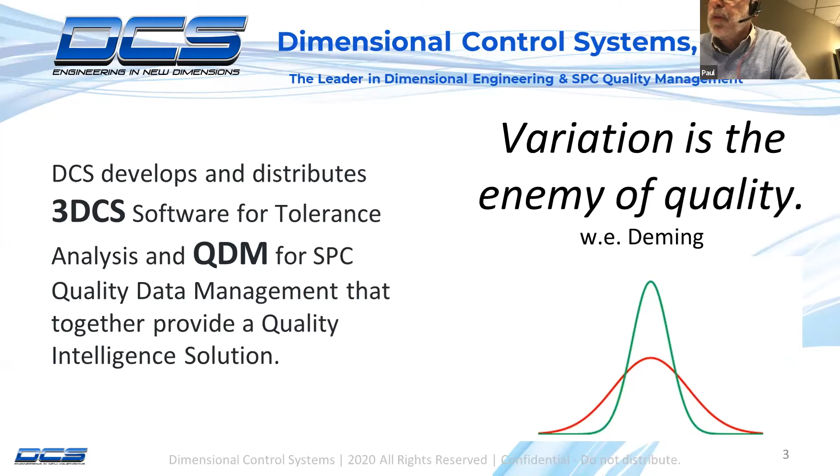DCS, or Dimensional Control Systems, is a world leader in the war on variation in manufacturing. DCS develops and distributes software solutions to help you throughout your product development lifecycle. 3DCS tolerance analysis software and QDM for SPC, quality data management, work together to provide a cradle-to-grave solution and coverage for your organization. I'm proud to be here today to introduce an exciting new function in the DCS software suite of solutions, the 3DCS Datum Optimizer.

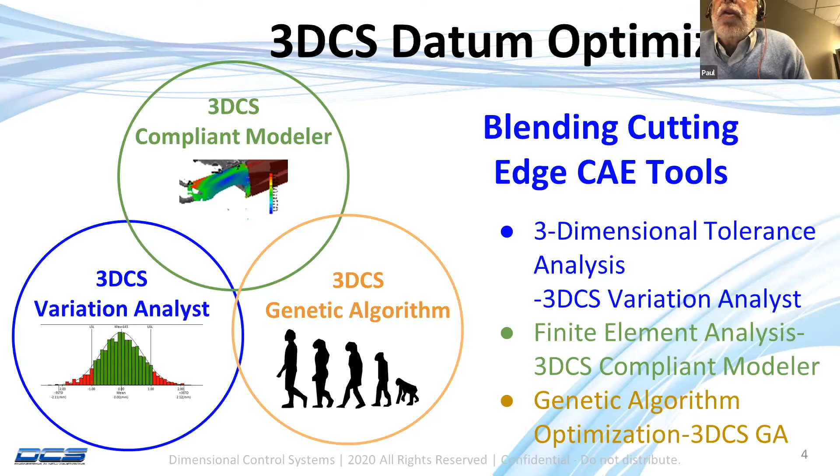The 3DCS Datum Optimizer is a unique combination of state-of-the-art CAE tools, including two that you may be familiar with, the 3DCS Variation Analyst tool, the 3DCS Compliant Modeler, and our newest tool, the DCS genetic algorithm. A little bit about each of these to try and frame this up and make sure we're all talking the same language.

The Variation Analyst is a tool that enables you to analyze the effects of part tolerances and assembly methods on dimensional quality. You can find and fix problems before they hit the factory floor. Included in the 3DCS VA, Variation Analysis Toolkit, is a Monte Carlo simulator that allows detailed statistical analysis and problem identification, as shown in the image on the left there, where we simulate many parts and then we can do statistical analysis, including histograms like this. You can see that there is a lot of production out of specification. We have a mean shift problem, etc.

Then DCS VA has a number of analytical tools to help you analyze the problem, such as geofactor analysis that can help you identify solutions and improve your designs quickly, as shown on the right. So we went from what's on the left, a lot of red, to what's on the right, where we have most everything in green.

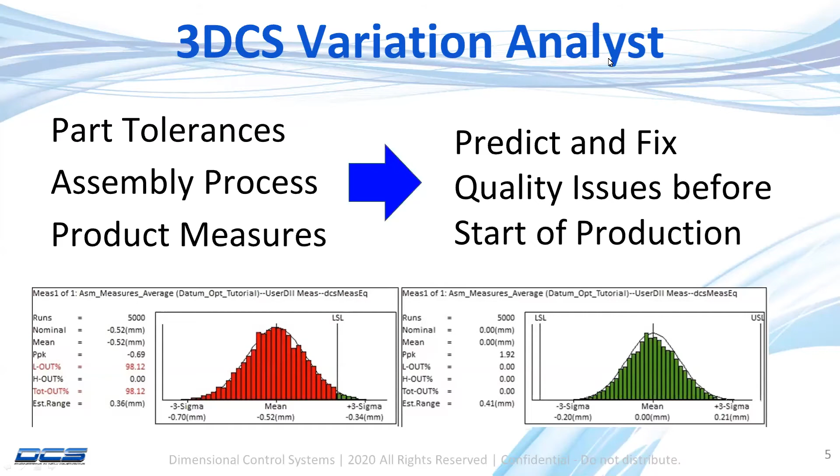The 3DCS FEA Compliant Modeler blends tolerance analysis with finite element analysis to allow you to measure the impact of product stiffness or external forces such as clamping, welding, bolting, or gravity, and all those could affect your dimensional quality.

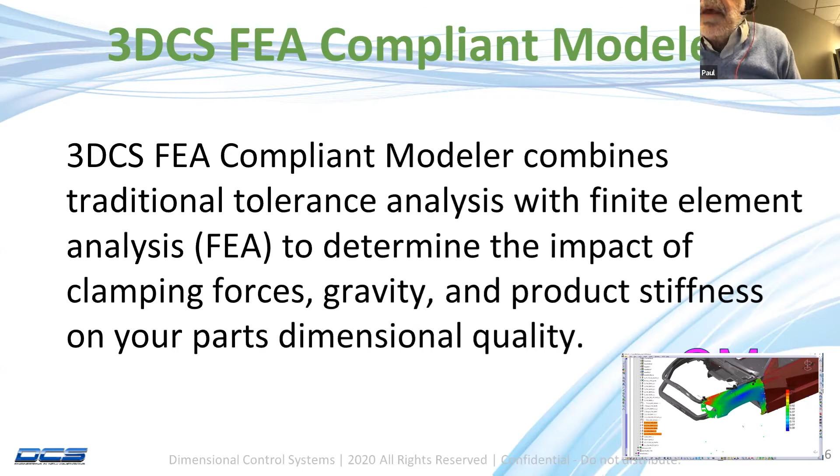These tools have been out for a number of years. What we've got is a new tool, the genetic algorithm, an optimization tool that allows us to help you find better solutions by automatically creating new product or process alternatives and evolving the design to better and better solutions. It's kind of a Darwinian development where only the strong survive and the weak are eaten. So we'll talk a little bit more at length about how we applied this to the datum optimization problem as the presentation goes on.

So we're here today, well, we're here virtually I guess, to discuss the 3DCS Datum Optimizer. Let's start at the beginning, which seems like a good place to start, and just make sure we're all on the same page and talking the same language.

Datums are fundamental and the foundation for dimensional management, dimensional control, and a key to variation reduction. Datums are used throughout the manufacturing process to locate parts, assemblies, and or the final product, to machine the product, assemble the product, join things together, and in measurements and measurement analysis.

Proper use of datums creates a well-defined coordinate system, as shown on the right, which enables you to locate features in their proper orientation and position. Datums are key to managing and minimizing variation, the enemy of quality.

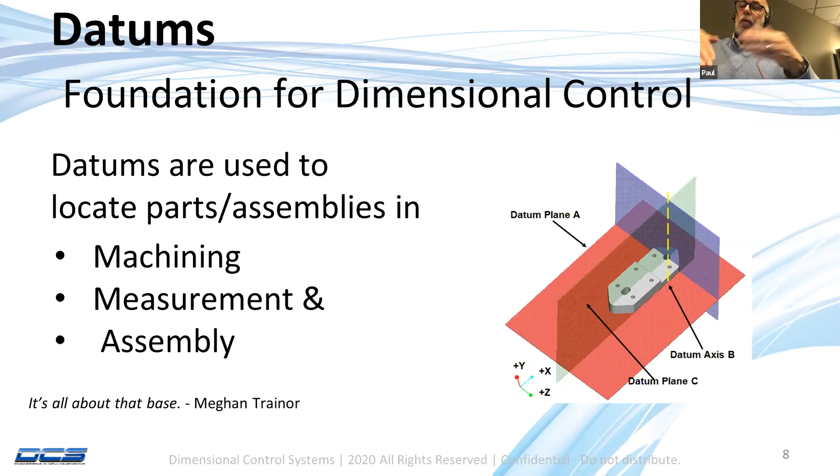Next slide, please. So what we're going to do is illustrate our new feature, this 3DCS Datum Optimizer. We wanted to choose a product that everyone could kind of understand and is familiar with, such as an automotive fender, because everybody's seen an automotive fender.

If we had picked up a different part, a more complicated part, like say a flux capacitor, we might have to spend more time explaining what the part is and how it works. We'll just pick something that is on almost every car, or at least the new ones, because in my neighborhood there's a few cars running around without fenders, I'm sure.

Fenders are fairly large, yet they're thin-walled. They are both stiff and flexible. If you lean on your fender too hard, you'll see it's not too stiff. You might dent it. And before all the attachments are made, it really is quite flexible. And you can move it around a little bit, and then it gets a lot of its rigidity after you join it to the vehicle.

Fenders also interface with a lot of the vehicle. We've got an interface to the door and the hood, the lamp, the fascias, the tire envelope. It interfaces with quite a number of parts. And as automotive manufacturers seek to have jewel-like quality, that means precision fits between all of the parts, the fender is one of the key components.

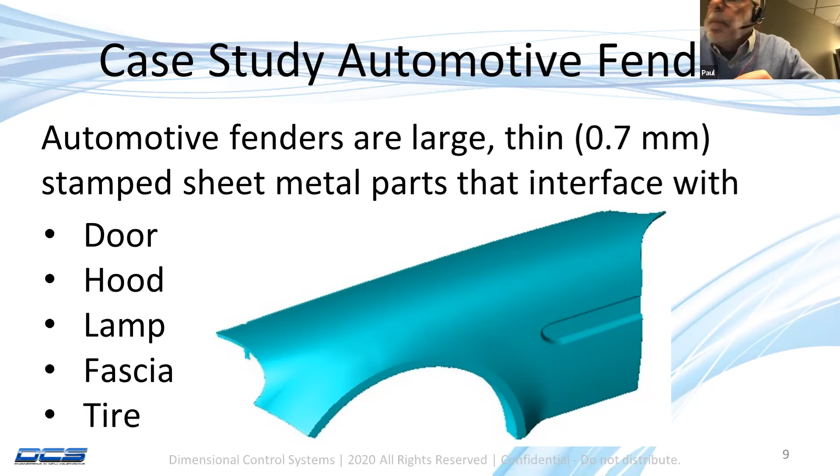Next slide, please. So the following slides will describe a typical project flow and show how 3DCS tool suite, variation analysis, compliant modeler, and the Datum optimizer work together.

Typically, we start with a team of people who have selected some datums and tolerances for the fender and the parts around it. They do that with some best practices or their experience or whatever, and then they do some analysis.

So 3DCS variation analysis was run to predict dimensional quality, and we get a plot. We can get one of our many plots, might be a histogram like I showed before, or this color plot where you can see how much variation we have around the fender. Red is high per the scale on the right, and then blue would be calm and low.

What we would like is everything to be blue, very little variation. Anywhere you see the red, we are having bad fits to the mating parts, which in this case might be the lamp and the fascia. Next slide, please.

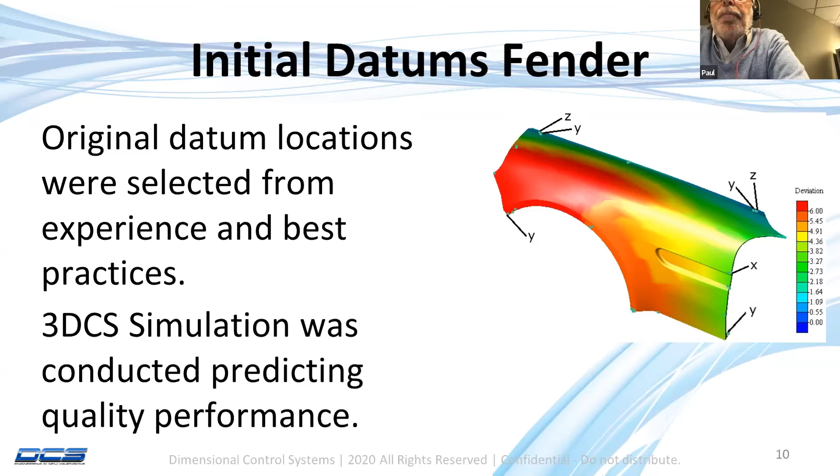So, you could say, Houston, we have a problem. What we've got is we have a number of parts that aren't meeting the specifications. We've got some mean shifts. We've got some excessive variation. We've got part distortion because it's not rigid, etc.

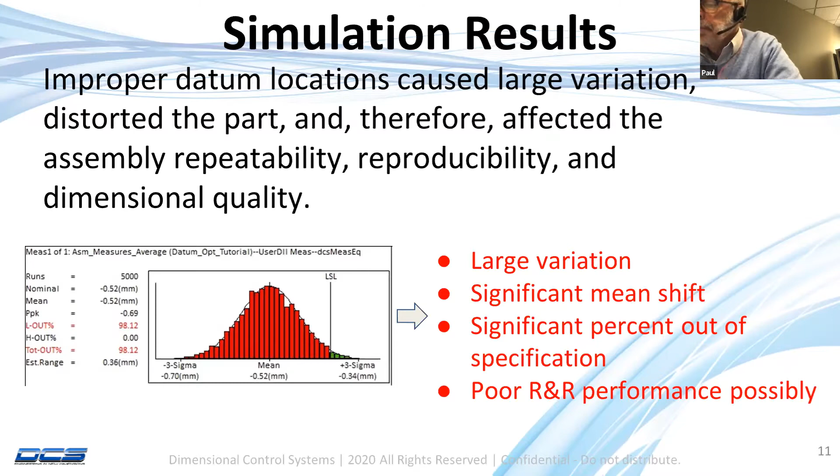Next slide, please. Now, we could locate the part many, many ways at many different points, and then we can combine these many different ways to locate the part. They picked the ones they've always used, and they got the results that you saw before. What if we changed? What if we moved from one part of the fender to the other to locate them? Now, the problem, and it's a business problem, is there are so many alternative datum schemes. How can we find a solution quickly?

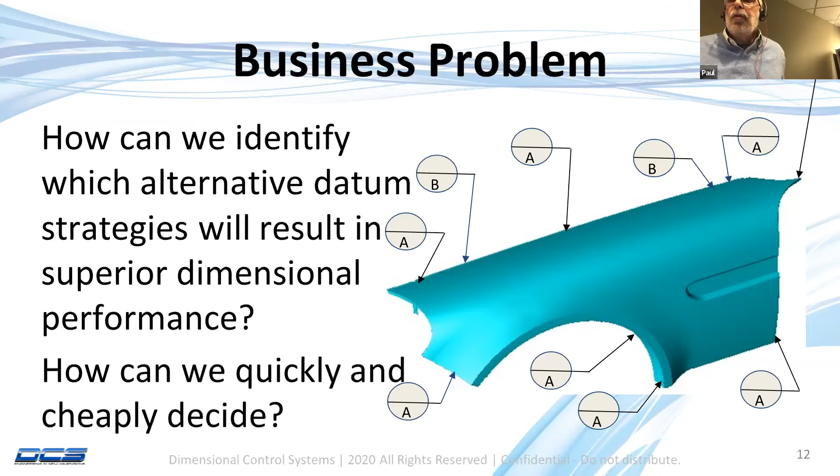So if you go to the next slide, this sounds like a combinatorial problem. So therefore, we could quantify the number of alternatives. And I'm sure you all remember from statistics class, the combination formula shown here, C sub n sub r, which calculates how many ways you can combine n factors. That would be the number of potential datums. R ways, the number that we're going to use in our study. Now, this isn't math class, so we're not going to ask you to solve the formula or remember the formula, but we've given you an idea of the magnitude of the problem with the table we've shown on the left here.

The first column is the number of datum candidates we have, the number of different ones we could choose, and then the number of datums we will use is shown in the second column. And then the number of combinations is shown in the third column. If you had 20 candidate locations, we wanted to use 6 datums to maybe over constrain our primary datum. We'll talk about that a little bit later. There's about 40,000 possible combinations.

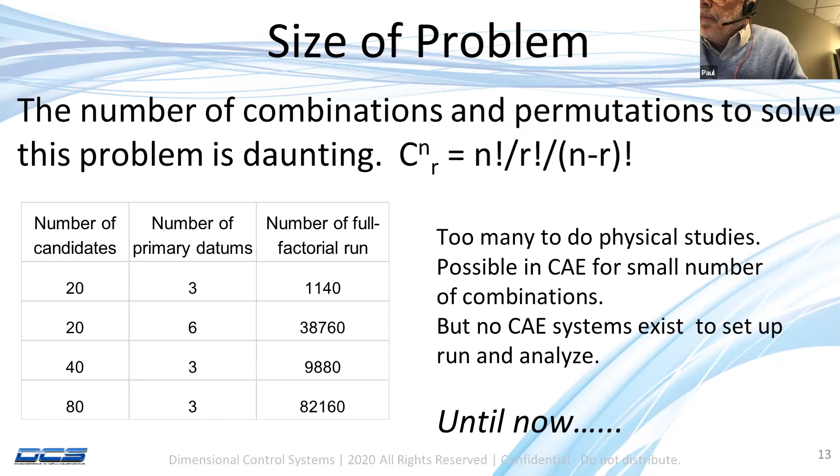If we had 80 candidate points, we're only going to use 3 for our primary plane. There's 80,000 combinations. And that's way too many to do physical studies, way too many to do in CAE. So this is really why we created the 3DCS Datum Optimizer. Next slide. The Datum Optimizer, or DO, just do it as we call it, provides the means to set up and run the combinatorial problem in just a fraction of the time, as we'll show you in a demo after I'm done talking here.

For any part, you select your part or assembly that you want to analyze. Then you can choose whether you're going to do a rigid part or compliant part analysis. I'll talk a little bit about that in a minute. And then you provide the candidate locators. Where on the part could we put a datum? And then the DCS Datum Optimizer will do the analysis for you and display the results.

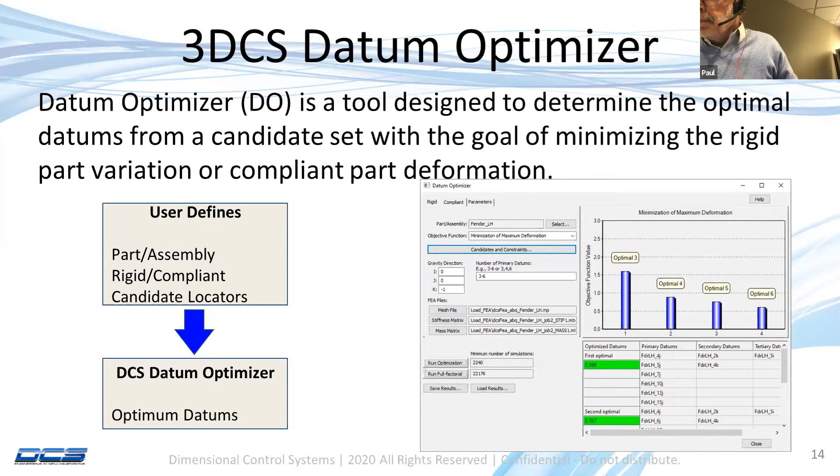Next slide, please. A quick note on rigid or compliant analysis. I talked a little bit about this. As I described earlier, datum schemes are usually set up in a 3-2-1 formula. 3 points form a primary plane, constraining 3 degrees of freedom. 2 points form a plane perpendicular to the primary plane, constraining 2 degrees of freedom, and 1 point forms the tertiary plane and constrains the last degree of freedom. And this is great for very rigid parts or very solid parts, maybe an engine block or something like that.

However, many parts may be thin-walled and are compliant, kind of like our fender we talked about. Then you might want to add additional locators to help stabilize the part. So you might have a 4-2-1 where the 4 points are constraining the part in the primary direction, or maybe 5-2-1, 6-2-1, etc. You are over constraining the part, and the Datum Optimizer will do this for you. Next slide, please.

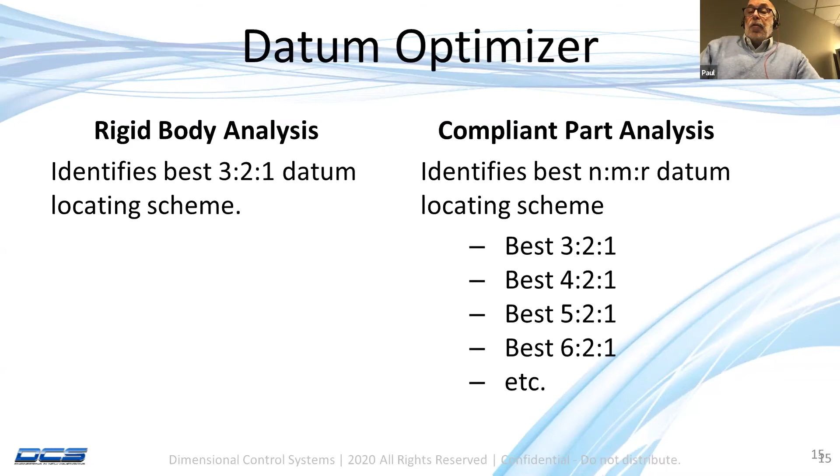Once you have set the part up, we've got our part, we've got our candidates, we've decided whether we're going to do rigid or compliant. We've decided, are we going to do 3-2-1, 4-2-1, 5-2-1, or look at all of those. Then we use our genetic algorithm. The genetic algorithm creates new datum strategies and evolves the design to better and better datum sets.

Only the best candidates are chosen to reproduce, and the parents' genes are then mixed, and then the offspring are evaluated. If they are better and are more stable and give better dimensional results, we keep them and they are allowed to reproduce. And if they are weak, they are not allowed to reproduce and they die off. It's a survival of the fittest game. And then as the generations go by, the design gets better and better and better. Next slide.

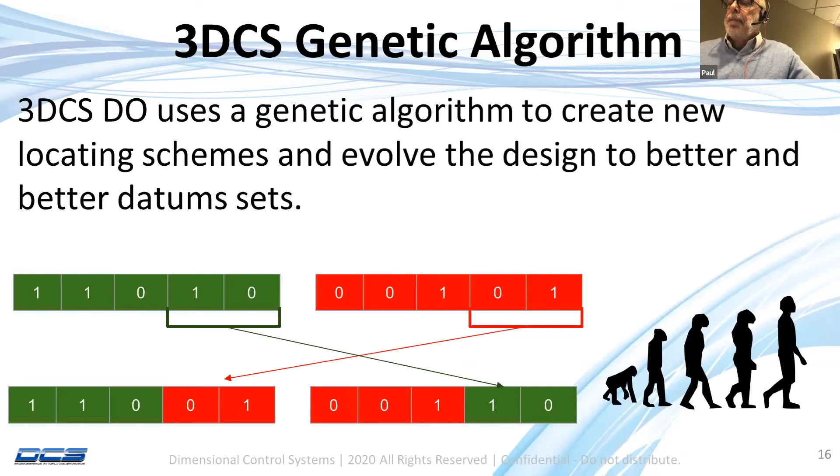All right. There is a note on this. I just want to point out that GA is like all optimization strategies I know. The only way to guarantee true global optimality is to run all the combinations. DO normally finds the true optimal, but in a small percentage of cases, it could converge to a datum set that is not global optimal, but it will always converge on a great solution near the global optimal. So I just want to be clear, we're not guaranteeing perfection, but we're guaranteeing a pretty darn good answer quickly. That's the bottom line of this slide. Next slide, please.

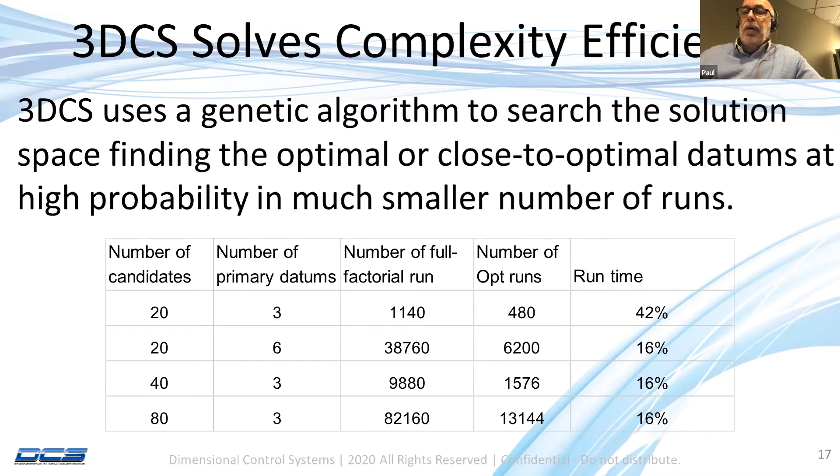Now, recall if you select compliant model, Datum Optimizer will solve best 3-2-1 as well as 4-2-1, 5-2-1, 6-2-1. You can ask it to do that, and then you get results like you see on the bar chart on the right, which shows how much variation we have with the best 3-2-1, that's the far left bar. As you add constraints, such as a fourth locator, variation is reduced and it gets better. That's the one next to it. It's a little bit lower. Adding a fifth reduces variation, and so does a sixth, the one on the right. Next slide, please.

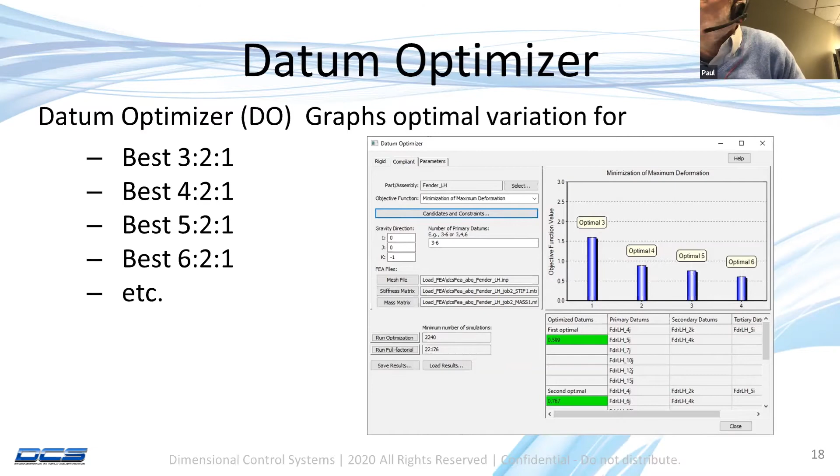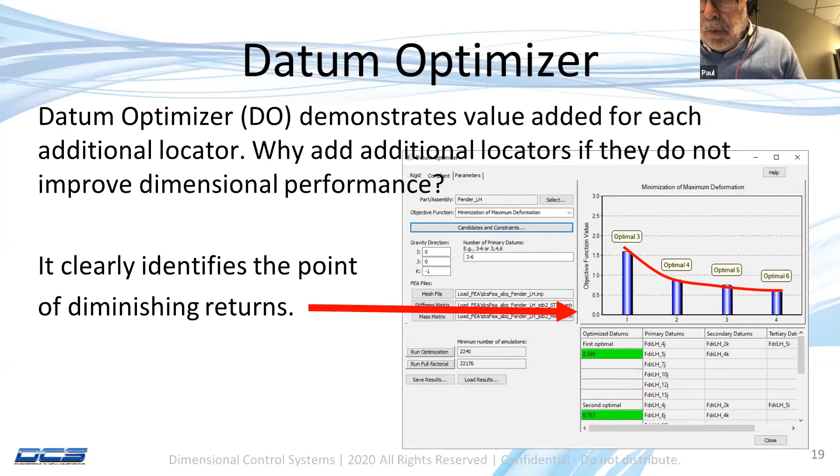Now, as expected, adding constraints does reduce variation, but each additional constraint is not free. It costs tooling money and potentially some process time, certainly maintenance, etc. So since we're spending more money, we want to make sure we're getting some bang for the buck. What's nice about the DO, it shows the point of diminishing returns and the value you get for each incremental tool cost. I can say if I go from 3 primary locators to 4, this is how much variation is reduced. If I go from 4 to 5, this is how much it costs, and this is what I get for it. 5 to 6, etc. So we can get business value out of knowing what we get from the optimal numbers. Next slide, please.

Then the DCS Datum Optimizer is integrated with the full DCS variation analysis toolkit and other DCS tools, allowing you to use the functionality to illustrate your results and sell your solutions, such as the color mapping we saw here. As we talked about before, on the left is where we started, and there was quite a bit of variation, some variation of 4 or 5 mils. And then, as I mentioned before, red is bad, blue is good and calm after we went through the Datum Optimizer, and not a huge difference in all of the locators, but a difference. You can see that the fender delivers much better dimensional performance for the same number of locators. So, as we promised earlier, changing only the location of the datums, variation can be reduced, part distortions can be minimized, and we don't have to spend money to do it. So this is the great thing about datum optimization.

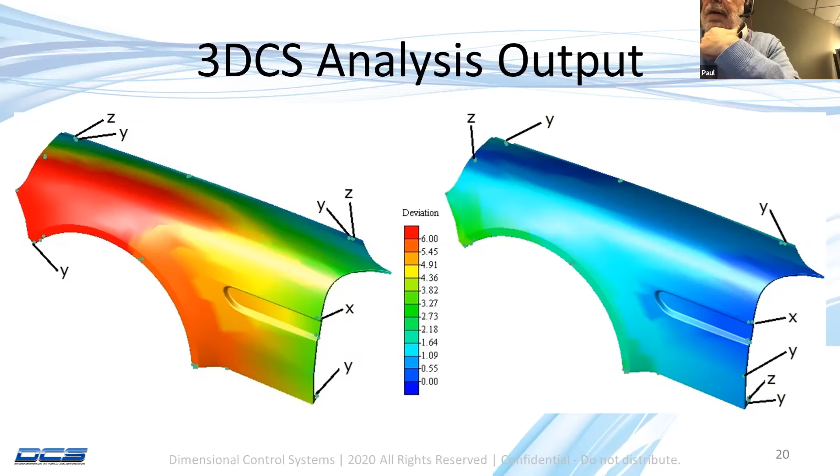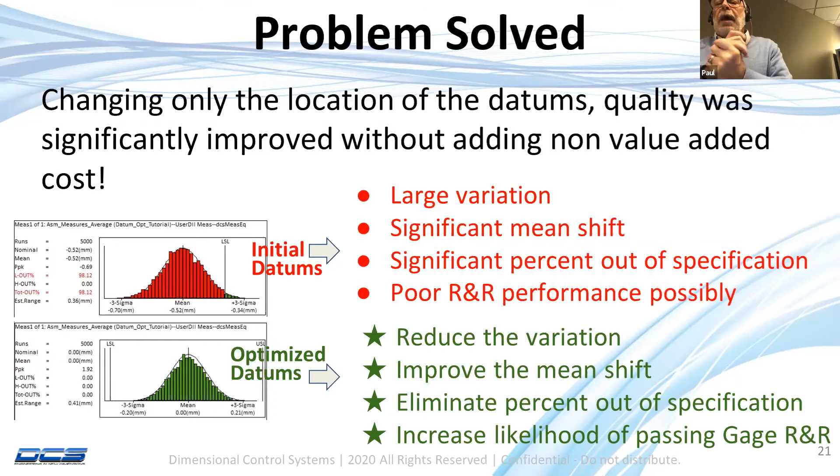Now I'm going to turn the presentation over to my friend and colleague, Maria Arangues. And she is going to talk about how we solve these problems. We go from large variation with significant mean shifts to reduced variation, no mean shifts, percent out of spec reduced or eliminated, and increased likelihood of passing our gauge R&R. Maria, please take over for me.

With pleasure. Hello, everyone. I'm going to show you an example of a fender, which Paul has been talking about all this time. Before I get there, Paul mentioned that there are 2 types of analysis with a datum optimizer. One is rigid, one is compliant. Each of them has 3 options of doing the calculation. We can minimize the maximum variation for rigid or deformation for compliant, and that means you look at all the points on the fender that were added, which have a certain role and importance in attaching the fender, and you minimize the maximum value of those points as far as variation or deformation.

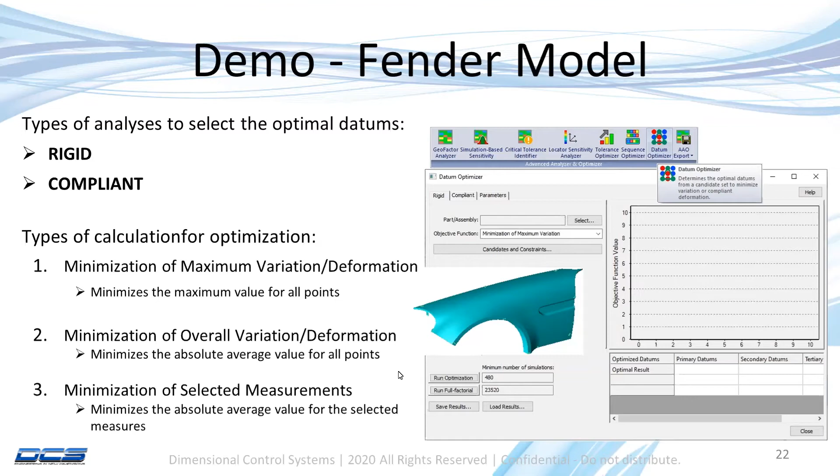You can also do an absolute average and minimize that absolute average of the same points with the second option of calculation, or you can use certain measurements that were created around the part and optimize for those measurements. And with that, give me a second, I'm gonna start with a model. So what do we have? This is a 3DCS model, and it has one part involved, the fender, and some empty part that represents the attachments, the body in white attachments for the fender to its corresponding parts.

Basically, the rear here will be gapped to the door. It can be gapped and flushed to the headlamp and to the fascia, and adjusted around the wheel house.

We have points created in the fender. There are different sets of points. We created 7 points for potential datums and locators in X direction. We have 10 for Y direction and 8 for Z direction.

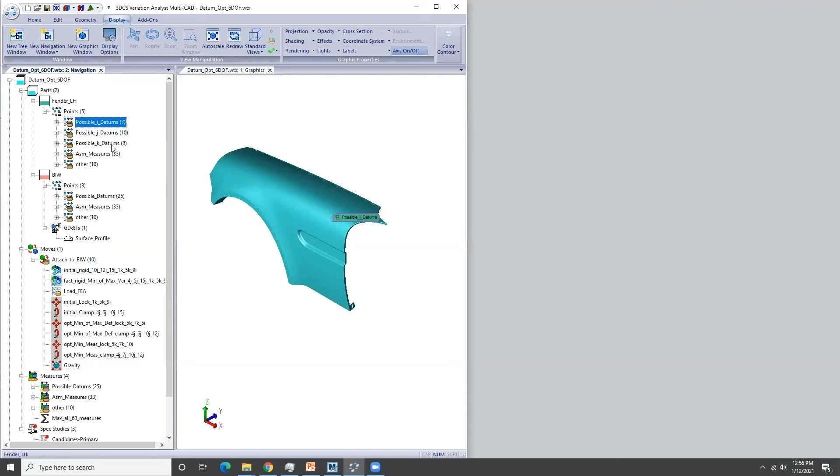We also have points created for the assembly measurements, the measurements that we'll use later to do different calculations. These measures are gap and flush measurements around the fender. And there are also some extra points just to throw them in. They are not used as potential locators. They're not used in measures, but they're also on the fender.

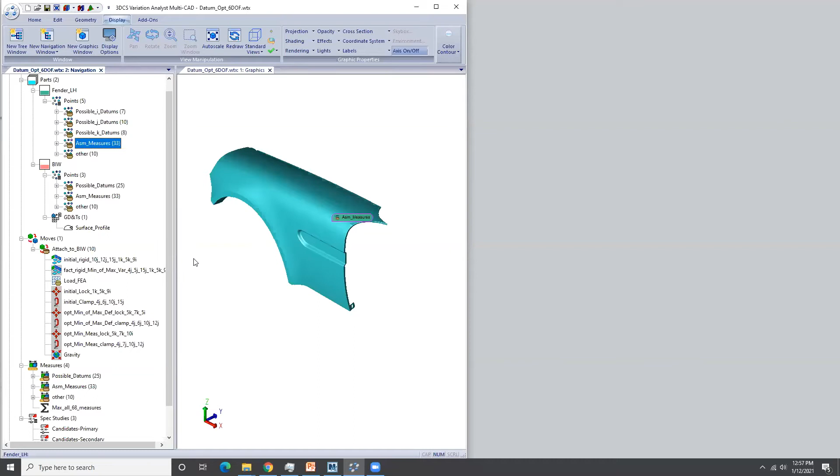So we will consider an initial potential locating scheme for the fender. This is a rigid move. This rigid move uses 3 points for the primary direction. I'm gonna move this to the side so we can see it. 2 points for the secondary direction, which in this case is Z, and 1 point for tertiary. These 6 points will fully constrain the fender to features on the fictitious body in white.

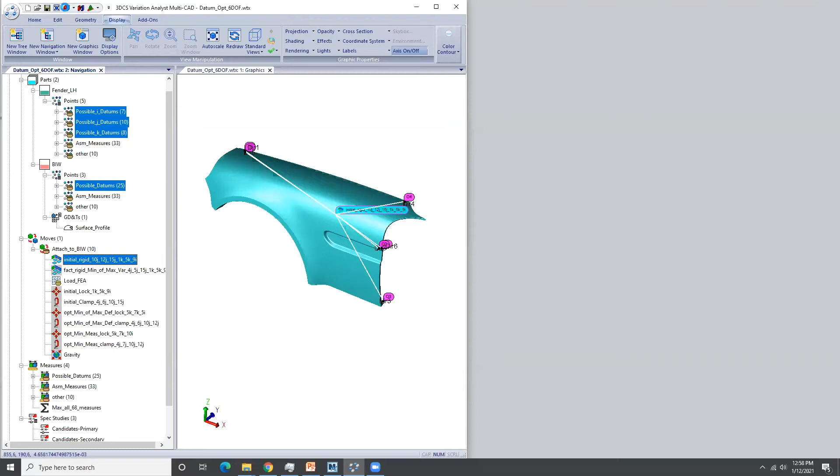And let's say we build the model with the rigid move and we run some simulations, let's say we run 2000 assemblies. We will get some results; we have one single measurement. The measurement that we're seeing here is shown on the graph with all these lines.

Basically, we have measurements all around the fender. The measurements are for all these points. We have 68 measurements for every point that's on the fender to the corresponding point that's on the body in white. These are distance measurements. So we measure basically the maximum of all distances between them.

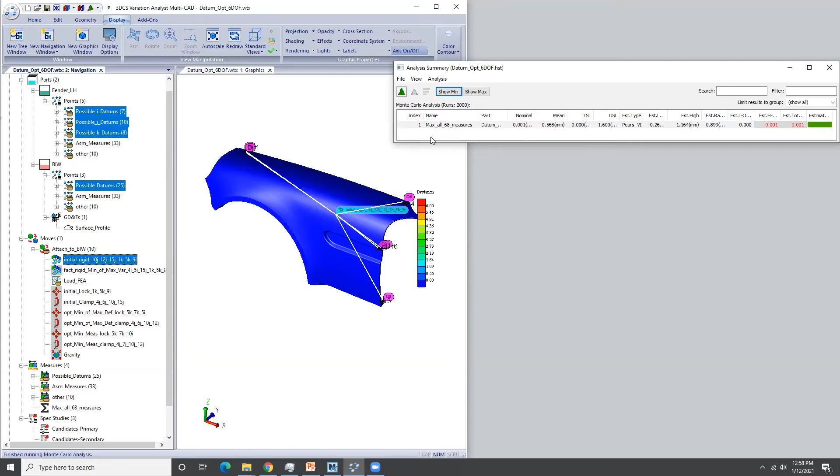Now, if we look at the estimated range and estimated high, they're somewhere around 1. So I'm gonna change the scale for deviation here and make it 1. And then I'm gonna say, show me the maximum of this measurement. And it shows me some red in this area. So let's keep this in mind and then go to the datum optimizer and see if we can get a better scheme than this.

Datum optimizer is part of the add-on modules of 3DCS. It's part of the advanced analyzer and optimizer. And I'm going to click the icon to open it. You've seen this dialog in the presentation before. This is a rigid study, so we're going to start with rigid. It's pretty easy to use. First, you have to select the part that you want to optimize. So I'm going to click on the fender.

Then you choose what kind of calculation you want to optimize. So I'm going to say minimize the maximum of all variation. That means every single point that's on the fender will be taken into consideration, and the variation for each of them will be considered.

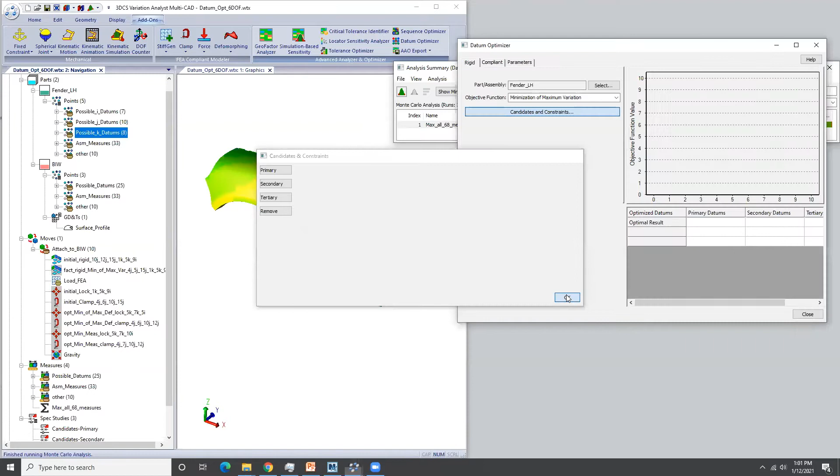And once we picked all of these, the objective function, the part, the candidates, we can look at the bottom of this dialog, and we see that we can run optimization with a genetic algorithm, or we can run the full factorial. This one is shorter. It's 120 samples. That's because we said I don't want to optimize for secondary and tertiary.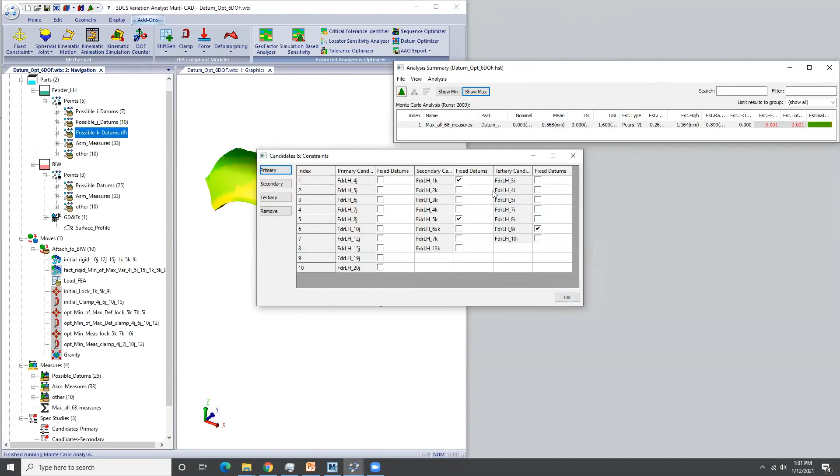So optimizing just these 10 points requires 120 calculations. This is probably under 1 minute. I am not going to run it because I already have the results. So I'm going to load my results that I previously ran, and I'm going to load the rigid.

And what do we have? We have 120 runs for the full factorial. And here I have my results, what I was looking for. And I kept the 1 and 5 and 9, right? I kept my secondaries and tertiaries the same, and I'm optimized for the primary.

Now, we can also say, okay, what happens if I choose the 111? If I choose the 111, I get obviously a different optimized number, a different set of optimized datums. So going back to 120, I prefer to get the best suggested. And what I did after this, I created another move with the datums 4, 5, and 15, just like it's shown here. It's exactly the same type of move, except 3 different primary locators, which are suggested datums than initially.

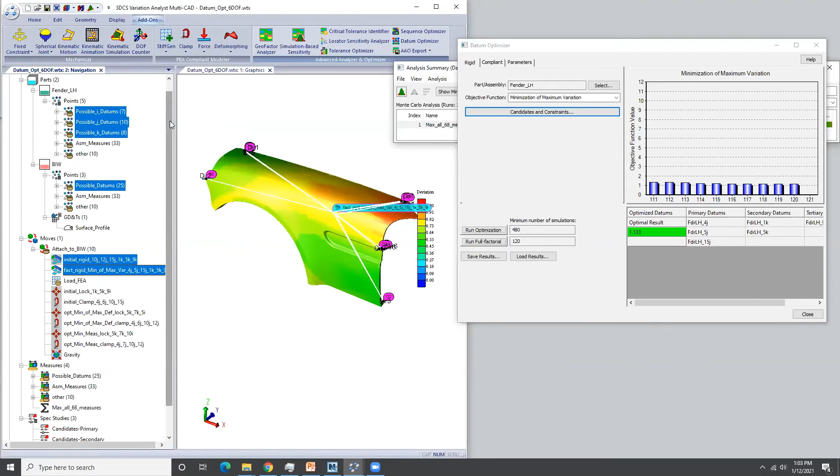So once we have this, I'm going to activate that move. I'm going to nominal build, and I'm going to run the simulation again, 2000 samples, see what we get. And let me minimize the datum optimizer for a little bit and put the new run below here. If we look at the variation, initially the estimated range is 0.899, then the optimized is 0.754, slightly better.

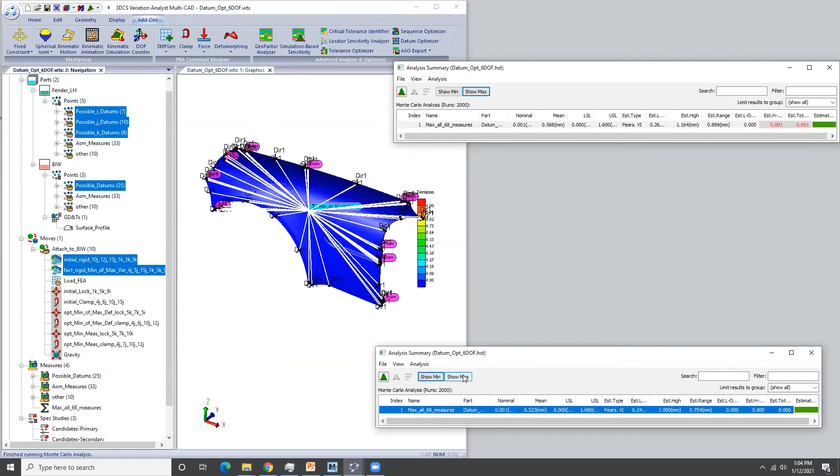So what is my maximum in this case? It doesn't show me any red, let me see, I have to go and activate each move in order to apply the maximum. So remember, initially we had a little bit of red corner here. Now that red corner is gone.

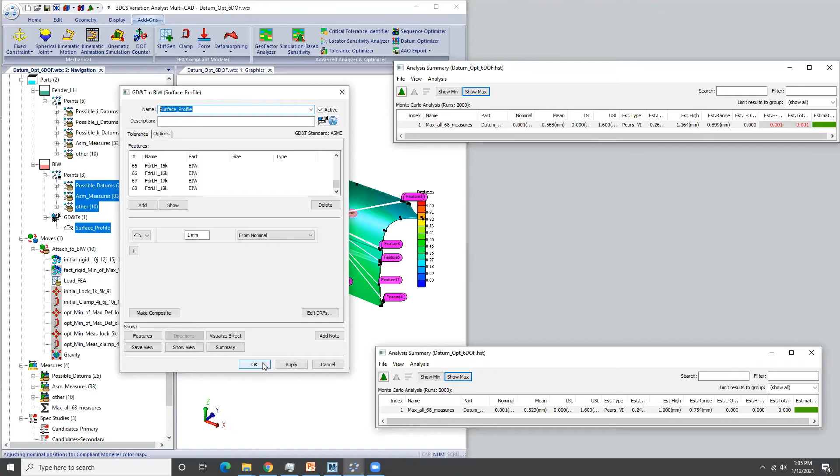So we did optimize the rigid, and the rigid is calculated based on best suggested datums, when we applied basically a surface profile tolerance on all the body in white features that come in contact or are measured from with the points on the fender. So the variation comes from attachments on the body in white, for these points or features that we measure to.

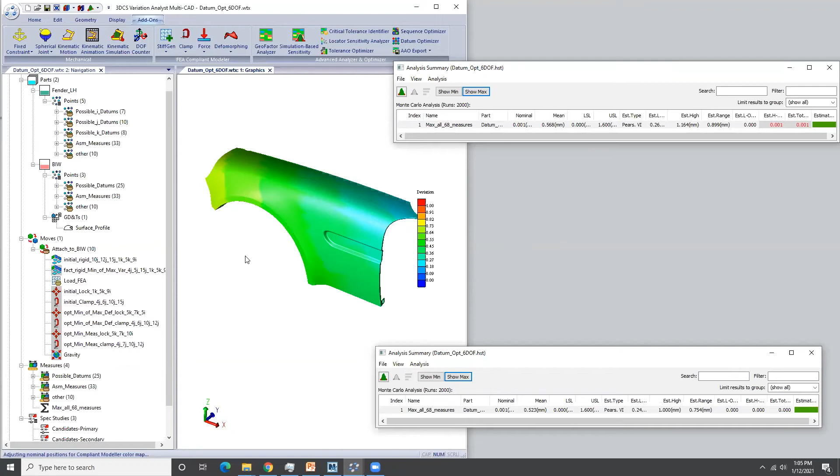Okay, rigid is nice, we made it better, but we have to remember there's other things that happen with a fender when you attach it, like gravity. So I'm gonna close these two, and I'd like to take this a step further. So I'm gonna bring up my Datum Optimizer, and I'll say, okay, let's see what happens if we let this sag due to gravity. For that, we need to use the compliant.

The compliant is similar to rigid in the sense that you again select the part. I selected the fender, and when I selected the fender, you've noticed that I have populated fields here like gravity, and gravity direction is -1, so it points down as expected. Now for compliant, I can pick more than 3 because I can over constrain the part in a primary direction. So let's say I want 4.

Then you observe here another set of fields which says FEA files. What is this? It's reading the information. Basically, it's reading it from this move, which is specific to compliant models. And it reads the information from Abaqus for a mesh file, for its stiffness matrix, which has to do with the deformation of the part, how the part deforms, and its mass matrix, which has to do with how gravity is applied. So to apply gravity, we need the mass matrix, and to deform the part, we need the stiffness matrix.

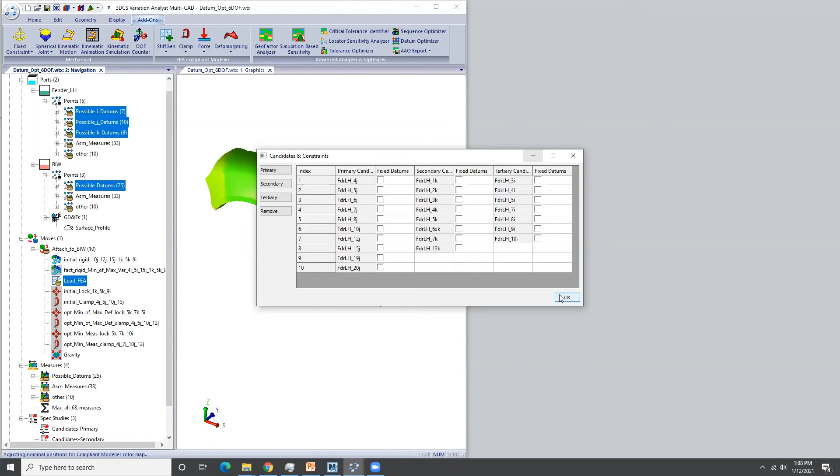For this kind of calculation, I want to run the optimizations. Even though full factorial is shorter, I just want to see how my optimization does. But I also want to say, I'm going to go to my candidates and constraints, and I'm going to say, I don't want to constrain the secondary and tertiary. I want to optimize everything. I want to do a 6 DOF optimization in all 3 directions.

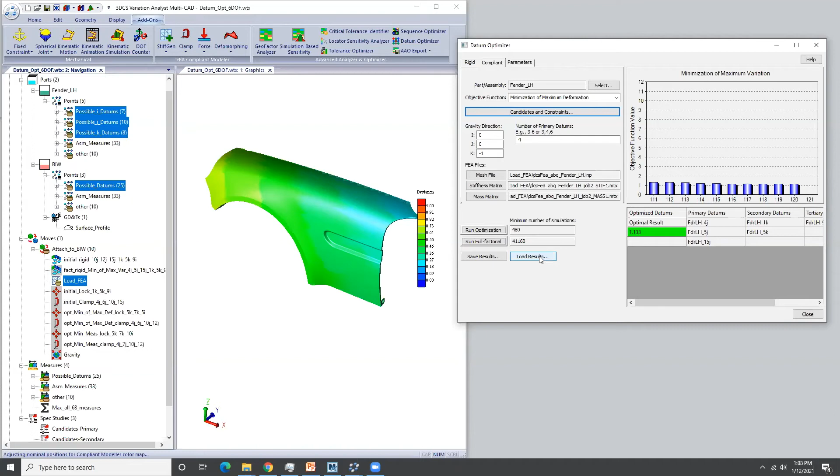Now, once I uncheck those, do you see my full factorial? It's much larger. So I'm definitely not going to run that. I'm going to run the optimization. I did run it before. It took about 1.5 minutes. So I'm not going to keep you guys here. I'm going to load the results for the minimization of maximum deformation with optimization.

So what do we have? We ran a set of 4 best optimized datums, and we got a bar that shows us the value of 0.584, which is right there, close to 6. And it shows us what the suggested datums are by the optimization. And we have 4, 6, 10, 12, and we have different for secondary.

So if you look at the initial, we also create an initial move. I'm going to activate these moves. We use this for secondary direction and tertiary. So we attached here and here for Z direction, and here I want it gapped to the door. So that's my tertiary direction. And we use another operation, a clamp, to attach it in primary direction. There's 4 attachments, so the fender is clamped and it's over constrained in Y direction.

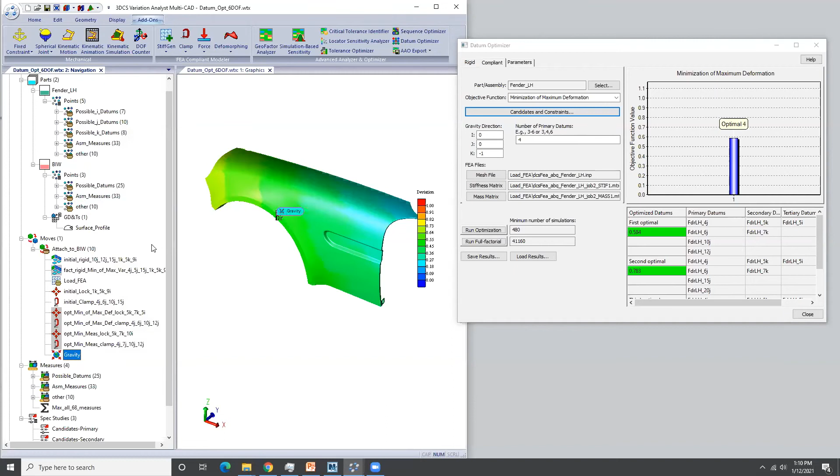Now these are the initial numbers. With the initial numbers here and applying the gravity, I'm going to activate the gravity. I'm going to do a nominal build, and whoa, it's all red. Why is it all red? Because my measurement, it's 5.4. So what I'm going to do, I'm going to change my scale here.

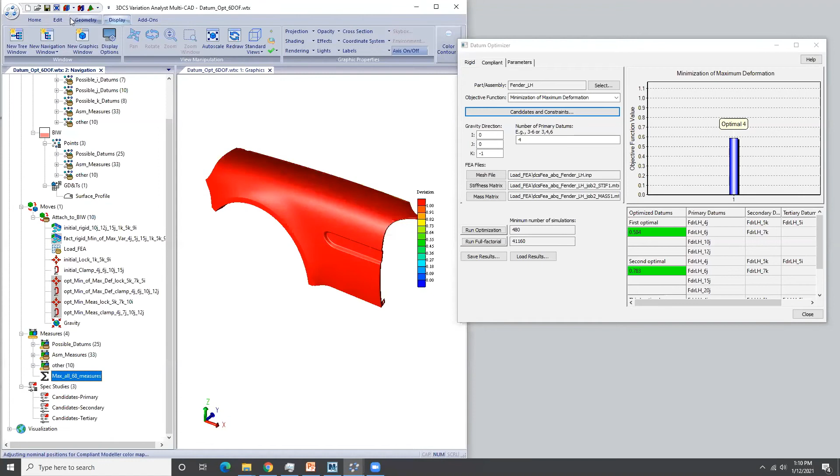For color contour, I'm going to make this 6. And I'm going to nominal build it again, basically apply the gravity again. So once I apply the gravity again, with these initial moves, you can see we have a section of red here, which gets basically to 6 mil deformation.

Let's say we ran the optimization, we got the results, we got these new suggested datums, and I'm gonna use those in the move. So I created 2 separate moves. A lock move for using 5, 7 and 5 for the secondary locators, and this over constrained again for primary locators. So I'm going to swap these moves and activate my suggested optimized moves. And I'm going to say nominal build.

Once I nominal build it, everything is nice and pretty and blue. And looking at the maximum value, it went from 5.4 to under 1 millimeter. So by changing the locators from that set of numbers to this set of numbers, we reduce a lot of deformation in the part, a lot of sag that happens due to gravity.

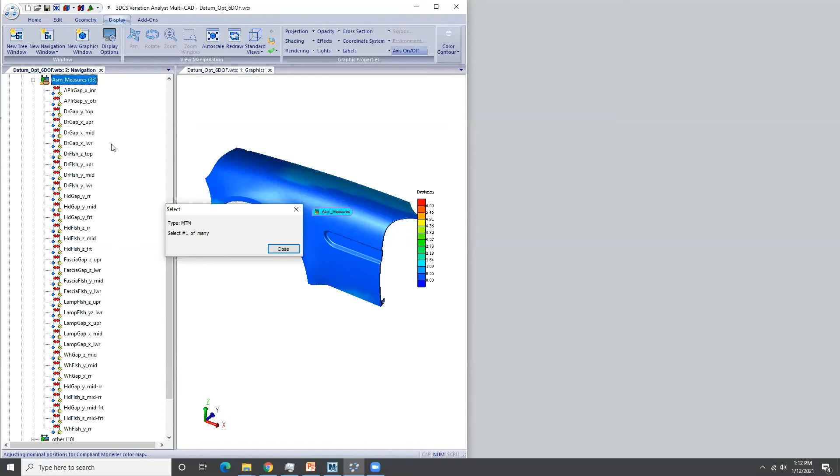There is another way that we suggest that you optimize your results, and that's valid for rigid and compliant. I'm going to demonstrate it for compliant only. We want to do a minimization of selected measurements. What does it do? It allows you to pick some measurements. And in this case, I want to pick these measures, which are all distance measurements from the body in white to the fender. And they're gap and flush measurements, basically. Once I pick those measures, it's going to solve for these measures.

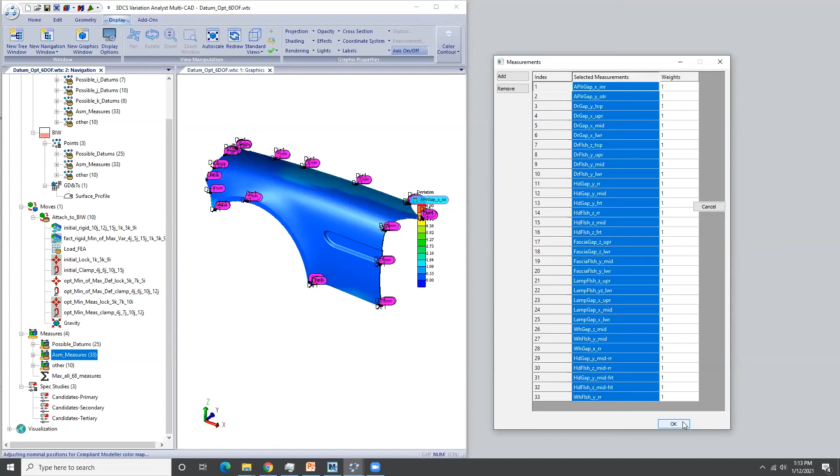Now you notice there's this column that shows all my measurements, all 33 of them, and they're all around the part. And I have the second column, which is called weights. In this case, I give the same importance to all of my measures because they have all the same weight. You can play with this number, make it smaller than 1, and it makes that measurement less important if you think that's the case.

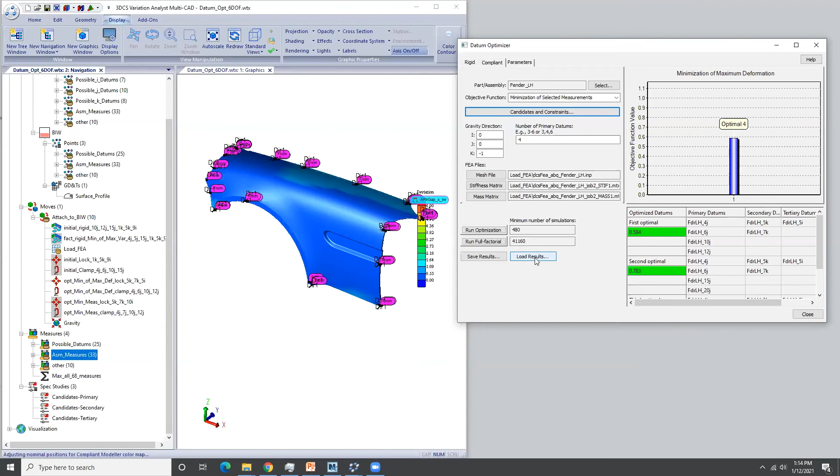Once we picked the measures, I'm going to use the same candidates and constraints. I'm not going to change this in any way. And full factorial, again, it's a large number, so I don't want to run that one. This takes, again, less than 2 minutes. We also want to solve for 4 datums, primary datums. So I'm going to load the results for that particular case, and it's this file.

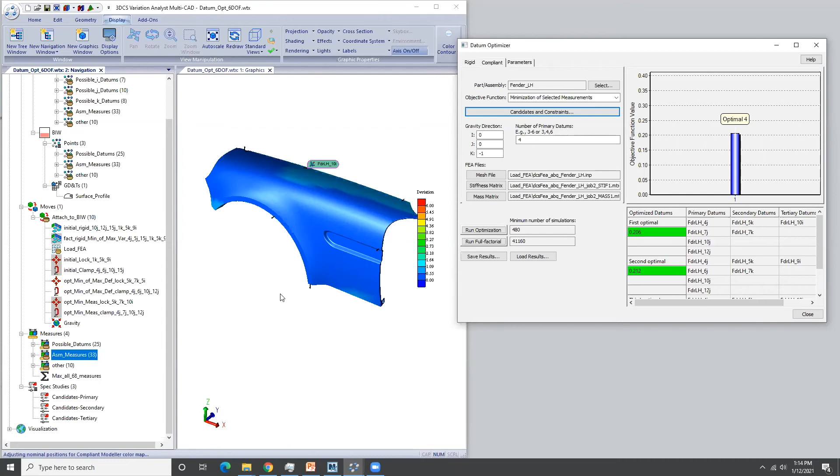What does this file tell me? It gives me a slightly different combination than the one that I used when I optimized for all points. Basically, this is like a smaller set of conditions to optimize for. So the secondaries are 5, 7, and 10 instead of 5, 7, and 5. So it wants me to use these 3 for secondary, where I have this for Z, and this is for X. And the primary, it's 4, 7, 10, 12 instead of 4, 6, 10, 12. Okay, so second point goes from here to here. Now, let's see what happens.

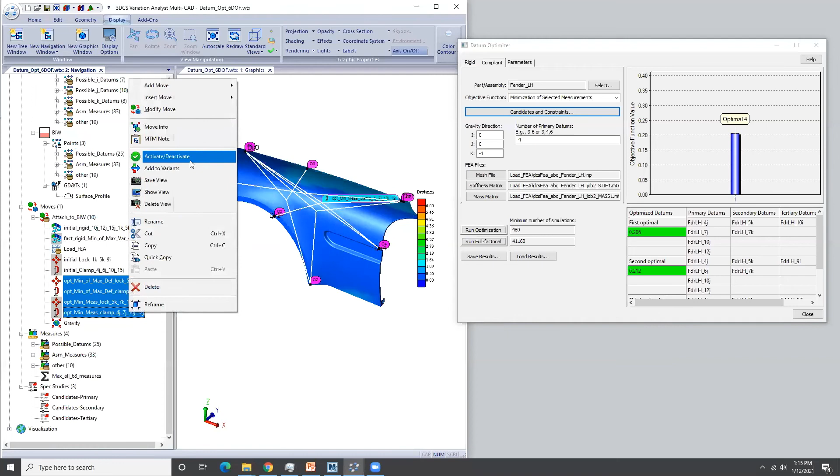So if we look again at the last results, the maximum value we got was 0.75. Now let's say we activate the last set of moves and deactivate the first ones, and we nominal build and see what happens to the part. It's still blue. Change the blue color a little bit, but let's look at the numbers. So from 0.75 to 0.68. So this is a little bit better.

And remember, we check everything around the part, not just the measures that we used to calculate. So we optimize for a set of measures and we got an overall slightly better result. From 0.75 to 0.68, it's really not a big difference.

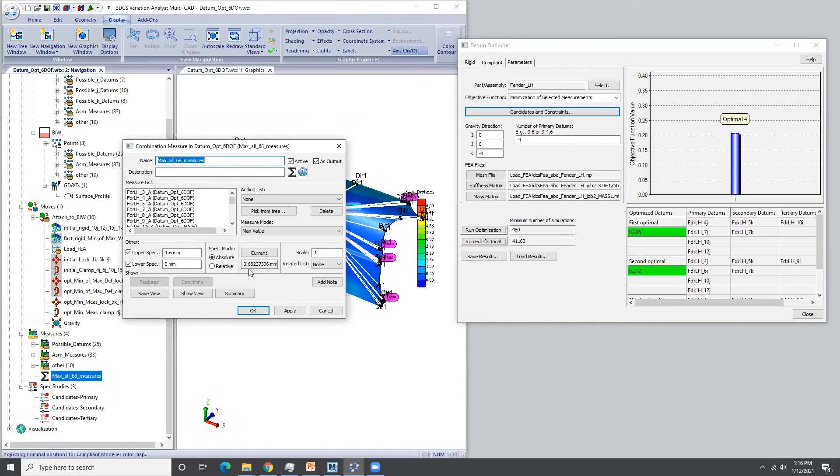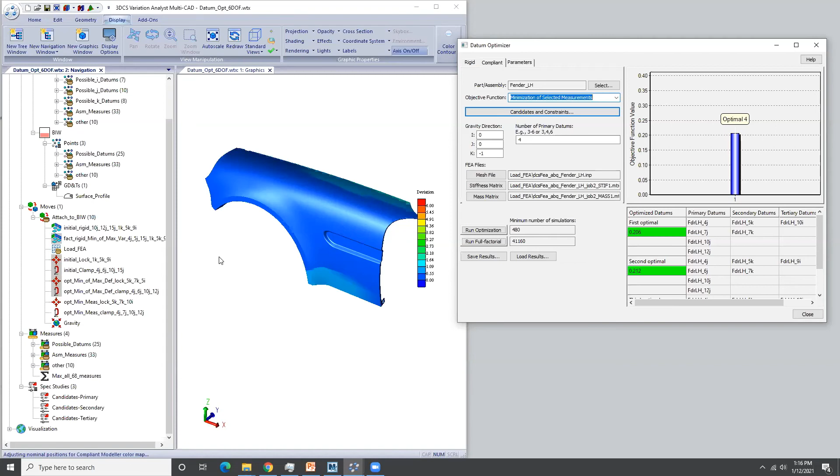If you venture yourself and want to run full factorial, I believe this is a smaller number than the previous one, when we ran the minimization of max deformation. So it should take a little bit less, but it will still take a significant amount of time, which you probably don't need to do anyway, because our initial results were, let me remind you, close to 6, and either when you optimize for all the points in the part or you optimize just for a set of measures, they both go from 5.4 to under 1 millimeter.

Either of them, it's good. You want to do these scenarios because sometimes you can't use these points. Sometimes one of them is not available for whatever reason, it's not reachable, so you use a different scheme for that.

Same goes for, if you look at the Datum optimizer, we have first optimal, second optimal, and we also have a third optimal. So we give you three options, three sets of points, in case the first one doesn't work for you, you have other options.

And I believe this is all I had to cover. So if anybody has any questions, please feel free.

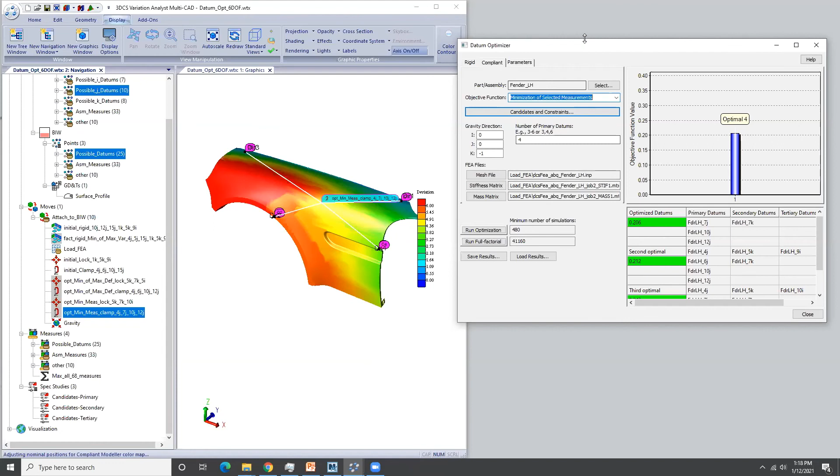This could go to either one of you. How critical is the selection of datums to the design dimensional engineering process? Paul? Well, it's the foundation for dimensional engineering, is the proper selection of your datums. And I think as Maria showed here in live time, you can make some fairly significant differences in dimensional performance, changing nothing but the datums. So I think in most dimensional engineering organizations, selection of datums is job one.

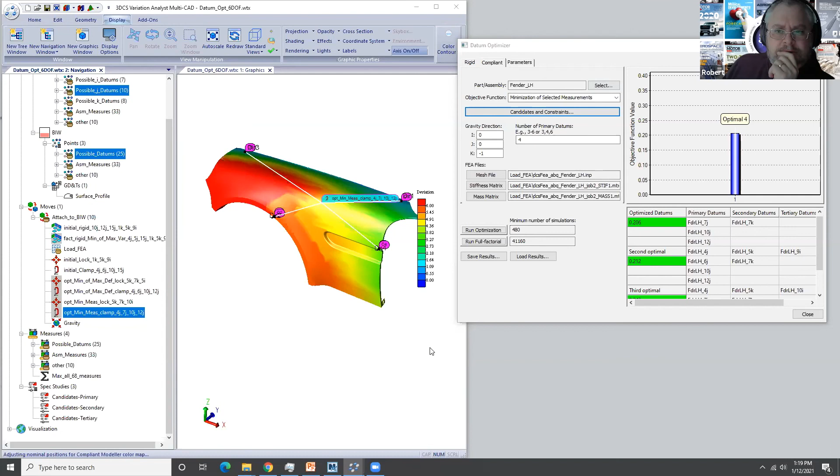And then we worry about the tolerances and everything else. So you talked a lot about this being a genetic algorithm. Is this an installed application or is this cloud-based? Because I've seen genetic algorithms are pretty popular in cloud applications. Well, I think it's installed. It's not cloud-based.

Mainly with sorting problems, it seems that the ability to run simultaneous simulations tends to help, this is a little more math intensive.

So besides tooling costs, what are some of the disadvantages of having more datums than needed? You also have process time, more things to break, maintenance, etc. So the goal is to have minimal tooling. That would be great, right? Less capital cost, less operating costs, less maintenance, less things breaking. So you want to get to the minimum. But sometimes you can't go to the minimum. You might need more than 3-2-1.

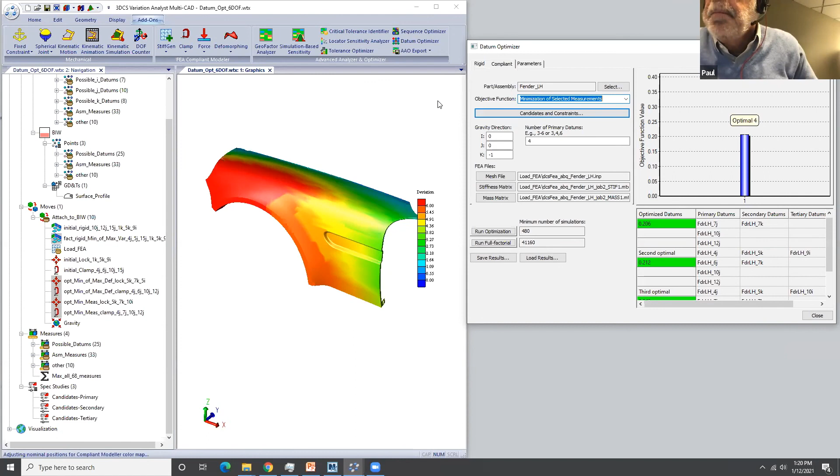Maria, you talked a lot about this, but how long does it take to make a datum optimization model? How long does it take to run that model? Well, it's not a lot if you think about it. The most time it took me was to create the measurements. Probably a couple of hours.

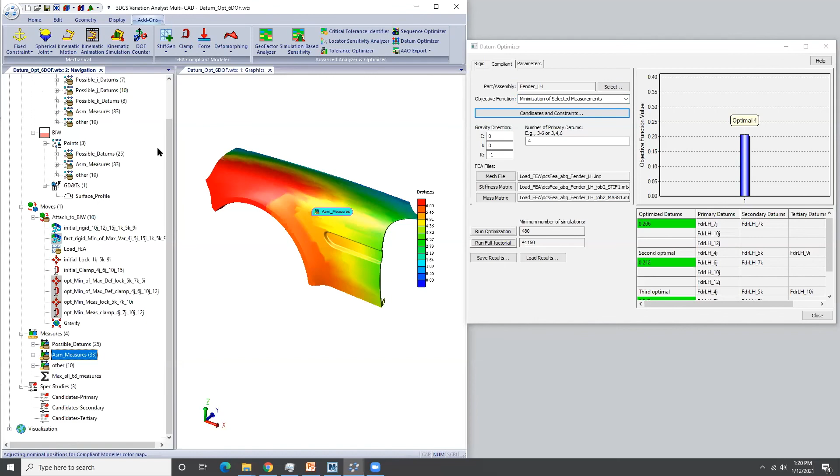All right, and lastly, who's using 3DCS these days? Okay, we have a lot of people that use 3DCS. I'm going to give you a list of companies that reduced manufacturing time using 3DCS, and these are just a few, on our webpage. Phillips, yeah, so some names I recognize on that list. Yeah, automotive, medical, aerospace, machine tools. So they're across many industries. I think, as Deming said, variation is the enemy of quality, and that goes for every organization that produces parts.

And Paul, you might be able to speak to this a little bit. You mentioned earlier that some of the tolerancing has gotten tighter over the years as companies are moving towards more jewel-like fixtures on vehicles. With the increased interest in electrification and the need for better noise performance, is that becoming a bigger issue? The gaps, the body gaps, and things like this, when you have no engine noise to drown out the sound coming from the road. I haven't really put a connection between those two.